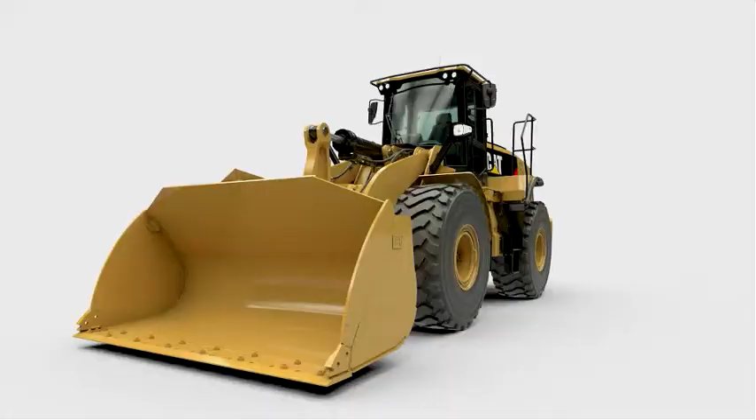So Danny, can you tell me a little bit more about the new CAT equipment? Yeah, Edgar, of course. Now, Caterpillar made the biggest changes several years ago. The majority of the iron in this machine is the same as the previous model. That's great news for us. With so much proven technology, you're looking at some of the most reliable products ever introduced by Caterpillar.

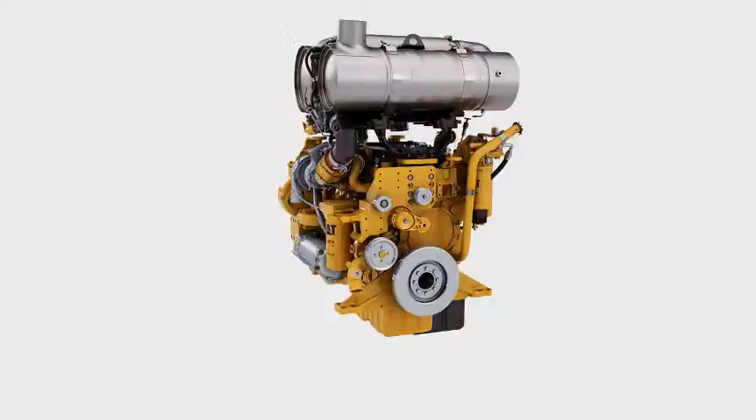You mentioned that the engines in the 175 to 750 horsepower range really hadn't changed that much. That's right, that's right. They were retuned to reduce particulate matter. That means the changes to the after-treatment packages are focused on NOx reduction. Let's follow the flow of the exhaust as it leaves the engine.

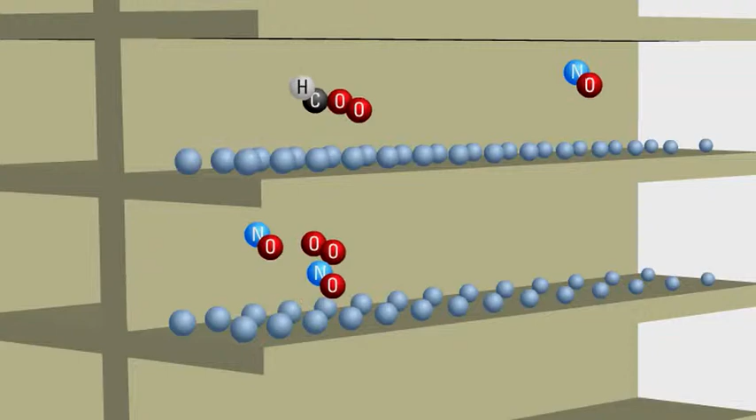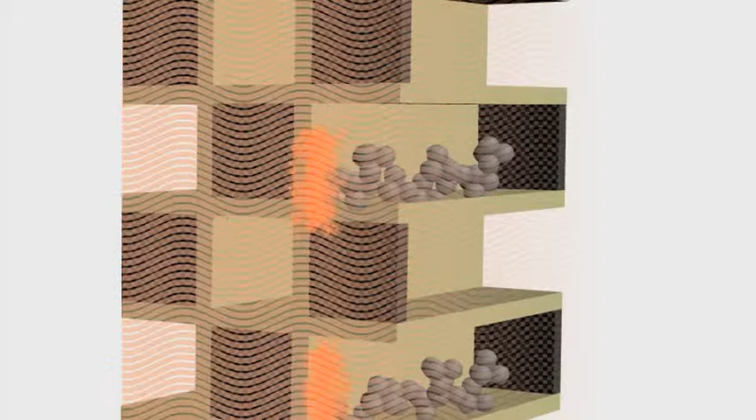First, some of the emissions are oxidized by the diesel oxidation catalyst. The diesel particulate filter traps whatever particulates do enter the exhaust stream. And if soot builds up, the active CAT regeneration system activates and removes it. This regeneration is automatic, so the operator really isn't involved and the work cycle is uninterrupted. Sounds like the Tier 4 interim solution.

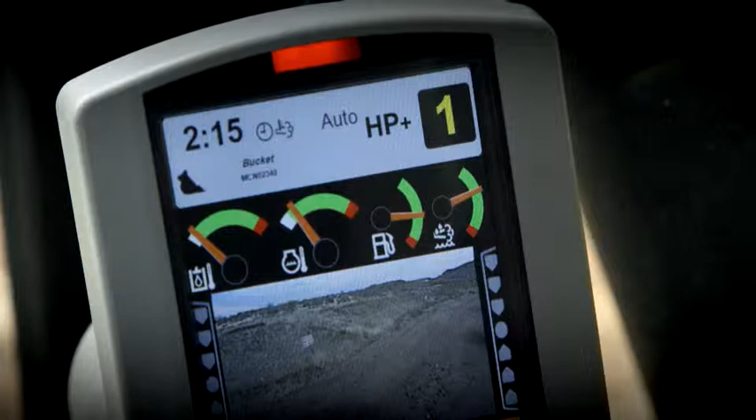It does, yes, but remember, in Tier 4 final, the engine reduces the amount of particulate matter that reaches the after-treatment system. Really what that means is regeneration doesn't happen as often. You may notice the regeneration system runs at startup, not to remove soot, but to warm up the new selective catalytic reduction system. So this is where the diesel exhaust fluid comes in. Yeah, that's right.

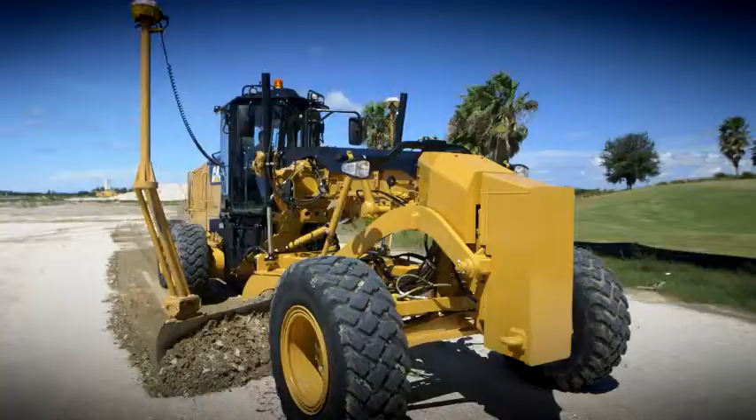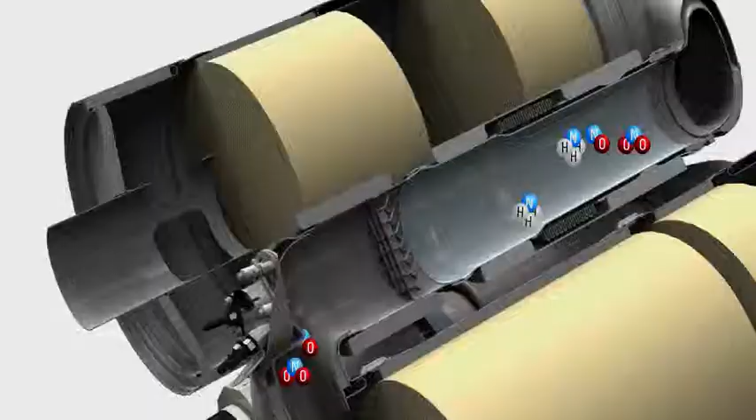The diesel exhaust fluid, or DEF for short, is a combination of water and urea. And it's used on all equipment with engines between 175 and 750 horsepower. Engines outside this power range may use a different technology. DEF is injected into the exhaust stream.

The water evaporates and the urea turns into ammonia. The ammonia mixes with the NOx and enters the selective catalytic reduction system. The catalyst in the system causes a chemical reaction which converts NOx emissions into two products: nitrogen and water vapor. So there's some new technology to keep track of.

Yes, it is. But here's the good news, Edgar. Caterpillar made it simple. About all you have to do really to maintain the engine and the after-treatment system is to fill the DEF tank every time you fuel up. It's just that simple.

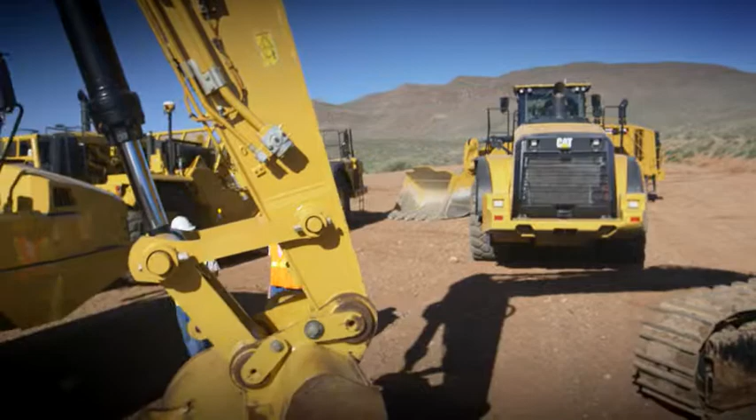Hey, look, do you have any more questions about the diesel exhaust fluid? Yeah, so you said that I should add DEF whenever I fuel up? Yes, that's the best way to go. Your engine needs two things to run: of course, diesel fuel and DEF. So if you fill up the DEF tank every time you fuel up, you'll always be ready to go, buddy.

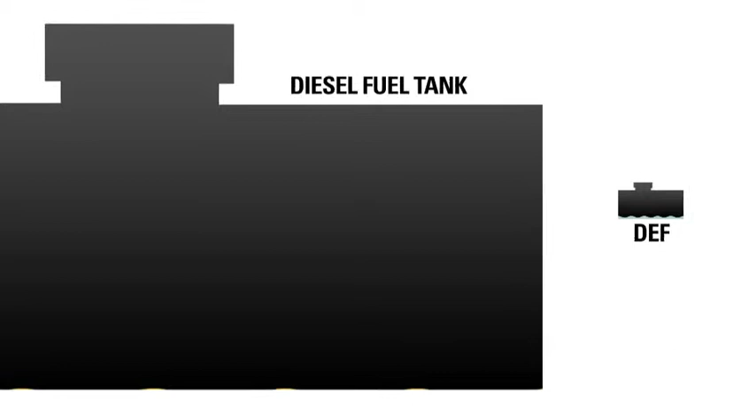You see, the fuel tank and the DEF tank are size proportionate. That means that if you start with full tanks, you'll empty them both at about the same rate. What if I run out of DEF? Well, it shouldn't be a surprise because there are level gauges in the cab. But if you run out of diesel exhaust fluid, your engine will lose power and then idle or shut down.

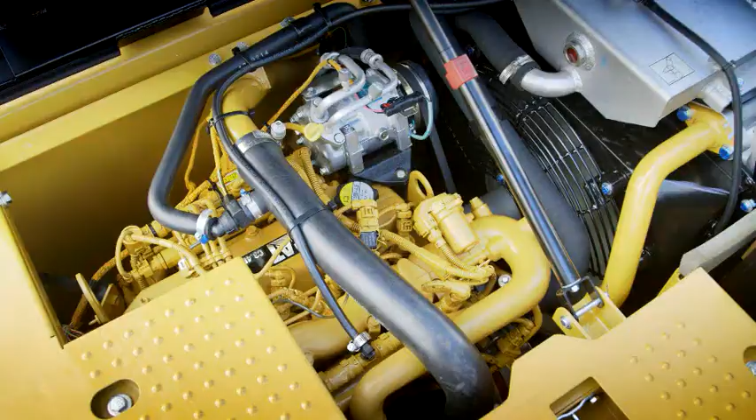Think about it this way. If you run out of fuel, your engine shuts off. If you run out of diesel exhaust fluid, same thing, your engine shuts off. What else do I need to know about DEF? Well, I'll tell you three things. First, DEF can freeze in cold temperatures.

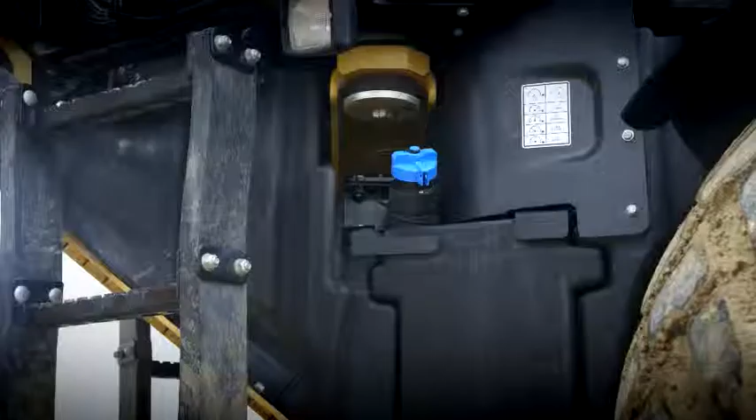So when you shut off the machine, DEF is emptied out of the lines so that they don't freeze between shifts. Now, in cold weather, the DEF in the tank will freeze, but there's a heater in the tank, so at startup, the DEF is thawed automatically. The machine takes care of that.

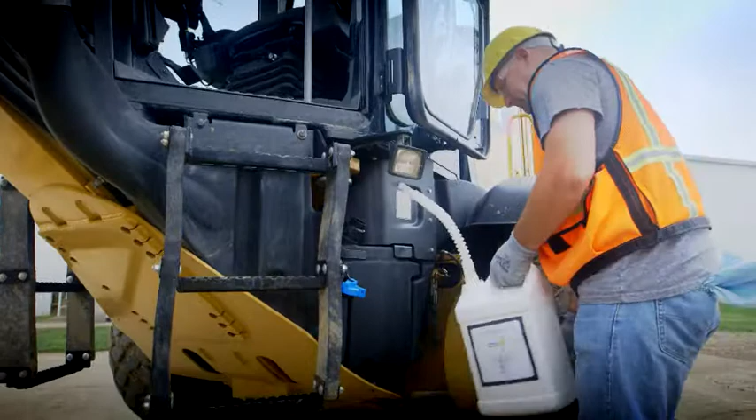Second, it's very important to use the right kind of DEF. The CAT equipment is designed for commercial grade DEF that meets ISO 22241-1, and you can get it at fuel and oil retailers anywhere.

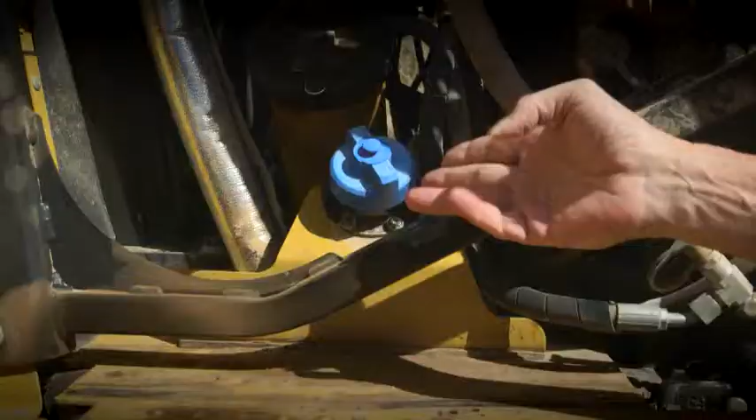Third, and this is going to sound like common sense, Edgar, but you want to pay attention to contamination control. I'm pretty sure I know what you're talking about, but walk me through it. Sure. Start by cleaning the DEF tank filler cap and the area around it. Now you're ready to open the cap and add DEF. You want DEF as clean as the day it was sold, Edgar.

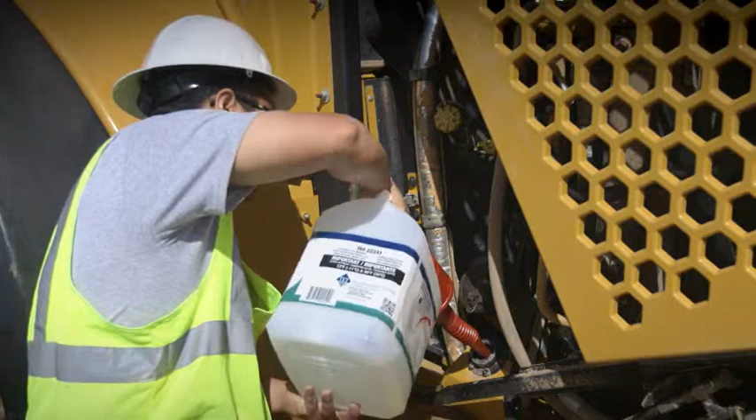You don't want to fill up the tank using any kind of dirty container. And that includes the funnel that you use. It's just as important. Use a clean one. Also, be careful filling the tank. You don't want to overfill it. DEF is corrosive to some metals, and you'd hate to mess up that nice paint job there. Finally, you want to clean up any DEF spills immediately.

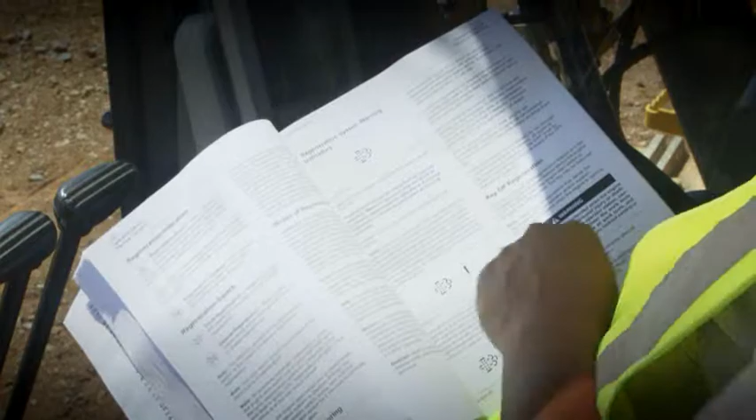Sounds pretty simple. Well, it's just like hydraulic fluid or diesel fuel. Keep it clean and you keep it running. Also, if you need a reminder, your machine's operation and maintenance manual has plenty of information on DEF, including the contamination control and the proper storage.

Hey, Danny. Yeah. Did you say the engine might keep running even after I turn it off with the key? Yes, sir. It's one of the changes that Caterpillar made to support the after-treatment system. It won't happen very often, but if it does, it's completely normal. When you turn the key to off with Tier 4 final equipment, the engine may continue to run for a time in order to cool down the exhaust system.

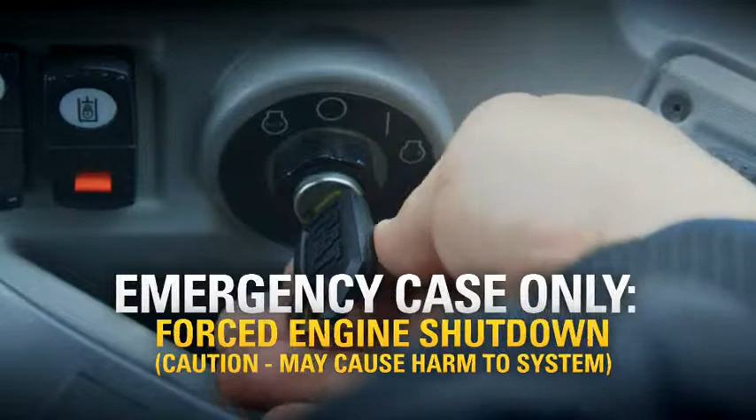If you have an emergency that requires an immediate shutdown, turn the key all the way to the left, but make sure it's an emergency. Forcing an engine shutdown may damage the after-treatment system. Okay, anything more I need to know about the shutdown process? Yes, there's been a change in the battery disconnect procedure.

The reason is, now in cold weather, diesel exhaust fluid can freeze. So you need the battery to operate the pump that moves the DEF out of the lines and back into the DEF tank. Pay attention to this light. It is the wait to disconnect lamp. Do not turn the battery disconnect switch to the off position until this lamp goes out. If you disconnect the battery while the wait to disconnect lamp is still on, you may damage the after-treatment system.

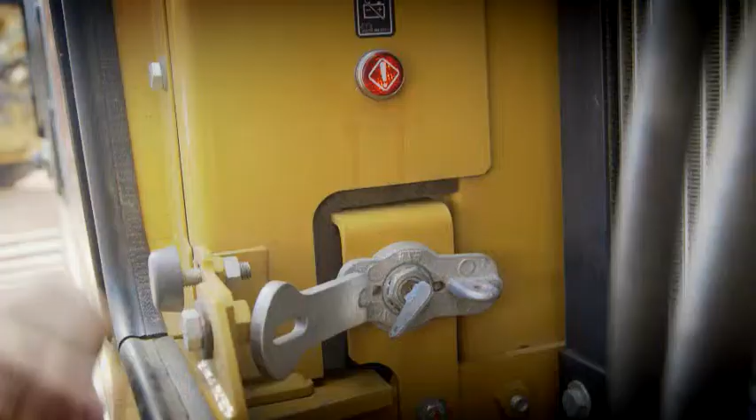Okay, so turn the key off and let the engine run. Right. And do not disconnect the battery until the wait to disconnect light goes off. I believe you got it. Any questions? Nope, I think I'm good. Good.

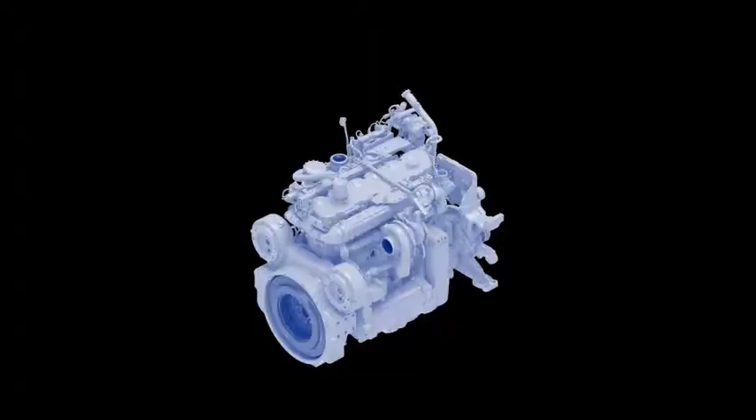Well, thanks for taking the time to talk to me, Danny. Yeah. So tell me, what do I need to know about Tier 4 final regulations? Well, Edgar, nobody, of course, likes to talk about regulations, but I'll sum it up this way. Tier 4 interim rules focused on cutting particulate matter emissions. Tier 4 final reduces the amount of NOx allowed. The good news is that there isn't really a lot to learn to use the equipment. Caterpillar has made it as easy as possible to operate.

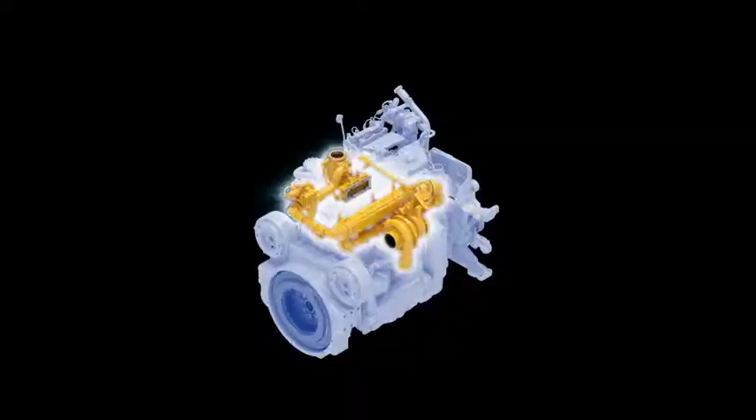So what's changed? Well, let's start by talking about what hasn't changed. For instance, the majority of the iron is unchanged from Tier 4 interim. Tier 4 engines and after-treatment packages quickly became the most reliable generation of machines ever introduced by Caterpillar, proven in thousands of machines over millions of operating hours.

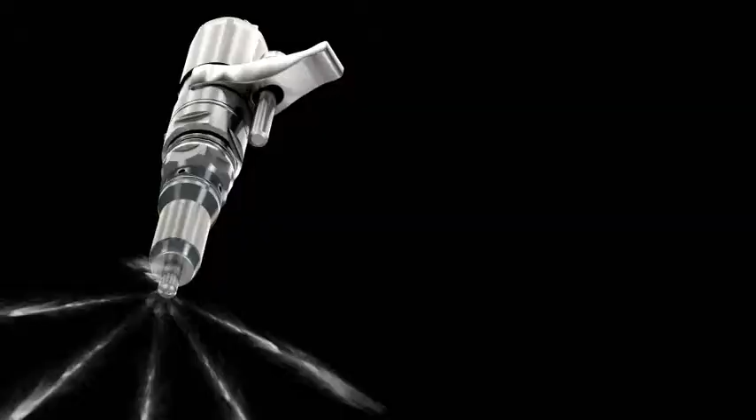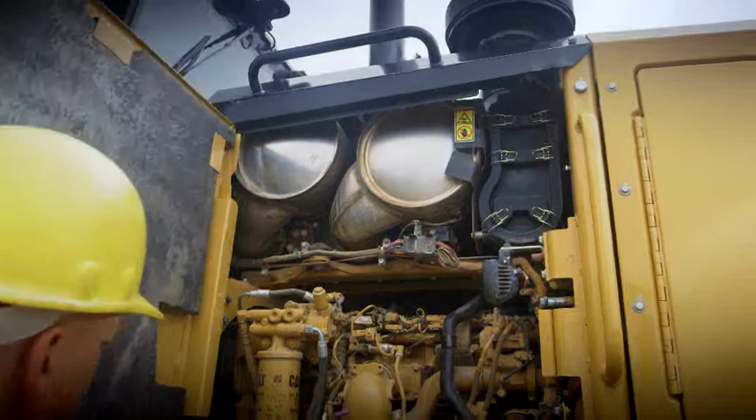Now, that means that these new machines are based on the same proven building block technologies: fuel delivery, electronics, air management, and combustion design, all optimized to work together. The new engine and after-treatment packages even fit into the same space. About the only change to the outside of most Caterpillar machines is the blue filler cap for the diesel exhaust fluid, which is used to reduce NOx emissions.

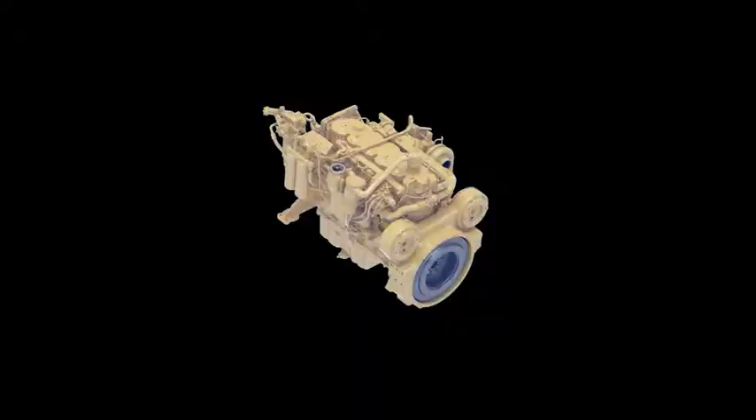So diesel exhaust fluid is new? Yep. Diesel exhaust fluid and the selective catalytic reduction system have both been added to all equipment with engines between 175 and 750 horsepower. And just those two things made it possible to cut NOx emissions. Tier 4 final engines are tuned to produce low levels of particulate matter, and the after-treatment system is focused on NOx reduction. But emissions are just one part of the story.

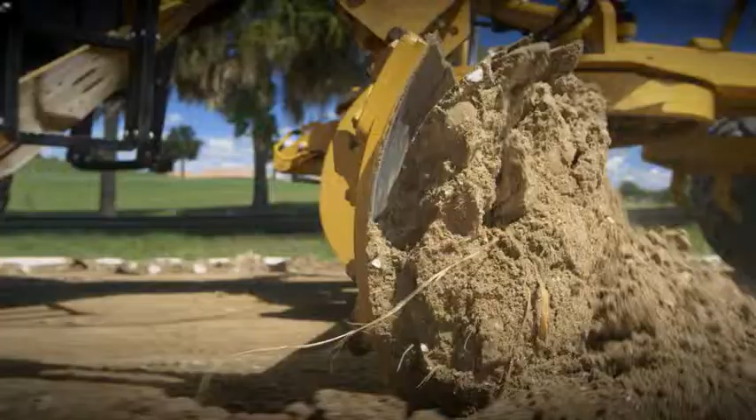The newest CAT equipment delivers the performance we need more efficiently than ever, which means we get the job done right and control our owning and operating cost. The benefits go straight to the bottom line.

Yeah, Edgar, I tell you, I really do like this new CAT equipment. I mean, I know they were designed to meet the requirements for the new T4 final, but they still have the power and the reliability that you depend on when you think Caterpillar. And they're more efficient, too. More efficient? Yeah, that's right.

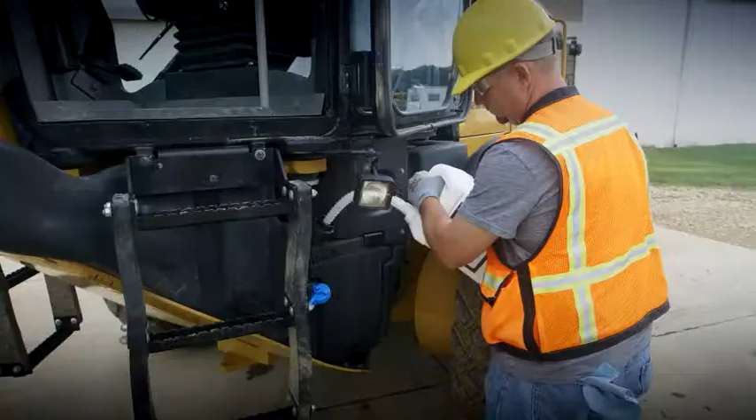We may not speak of it in terms like we used to, but, well, let's take fluid efficiency, for example. Don't you mean fuel efficiency? Not anymore. Fluid efficiency accounts for both fuel and diesel exhaust fluid. You can't forget the DEF. Now, new CAT machines do use less fuel than the previous models, and that's great, especially in countries with high fuel costs. But you still have to add in DEF to account for your total fluid costs.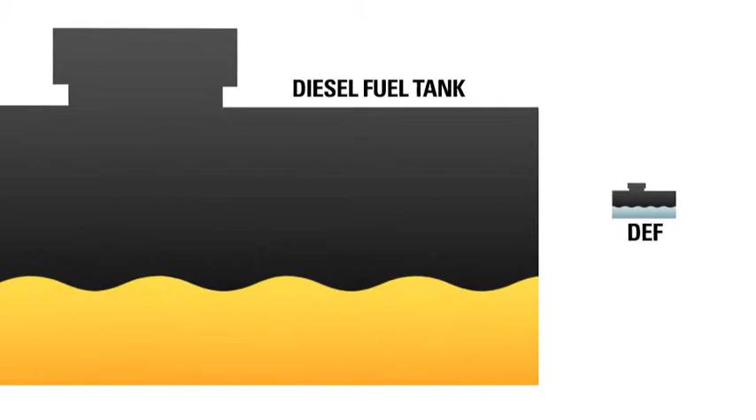Now, here's the really good news. Take a Tier 4 interim machine with a full tank of diesel. Now, compare it to a new machine with a full tank of diesel and a full tank of DEF. On average, the new CAT machine will use up to 5% less fluid to do the same work as earlier machines. 5% less? Yep, and up to 8% less diesel fuel. Oh, you're going to love running these machines, buddy, I can tell.

Man, I love that new cab smell. Yeah, I do too, Edgar.

Now, I noticed some new lamps here. What do I need to know about them? Well, you're looking at the lamps that have to do with the after-treatment system, and of course you recognize the regeneration lamp there, having run a Tier 4 interim machine before. Yes, there's regeneration in process, regeneration needed, and regeneration disabled. Exactly, and then of course there's the DEF gauge, fuel gauge there, so pretty proud of you there, Edgar. You're doing good, son. You learned more than you thought you did, didn't you?

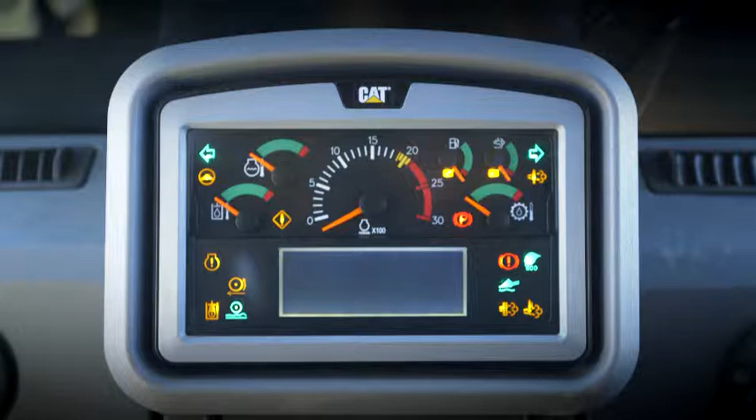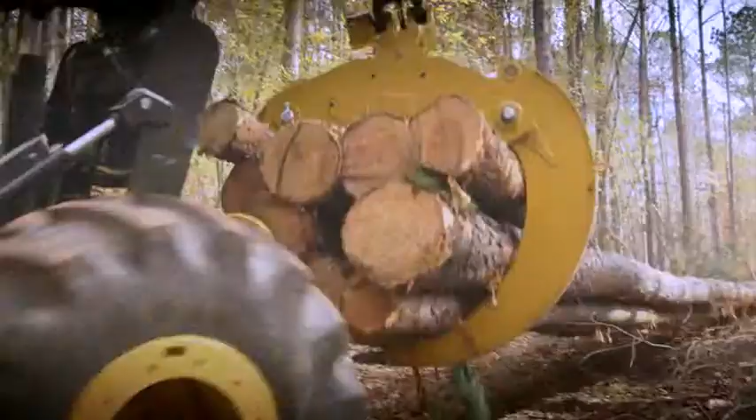These other lamps will illuminate if there's any emission systems fault or engine or after-treatment fault, or if the DEF tank gets low on diesel exhaust fluid. The good news is you probably won't have to worry about these lamps, especially if your machine is set to regenerate automatically and you fill the DEF or diesel exhaust fluid tank at the same time that you fuel up. That is good news. It is.

I can't emphasize how important it is to know your lamps, Edgar. It really is important. I would highly recommend learning this card right here. It's got all the details for you.

Danny, can we go back and talk about regeneration for a bit? I know how it worked for Tier 4 interim. What's different with Tier 4 final equipment? Well, you remember when we were talking about the regeneration with those Tier 4 interim machines? I know that probably seems like forever and a day ago. It sure does. Well, regeneration works to control soot the same way in Tier 4 final engines. The difference is the system doesn't have to work nearly as hard because the engine has been tuned to reduce particulate matter before it ever gets to the after-treatment system.

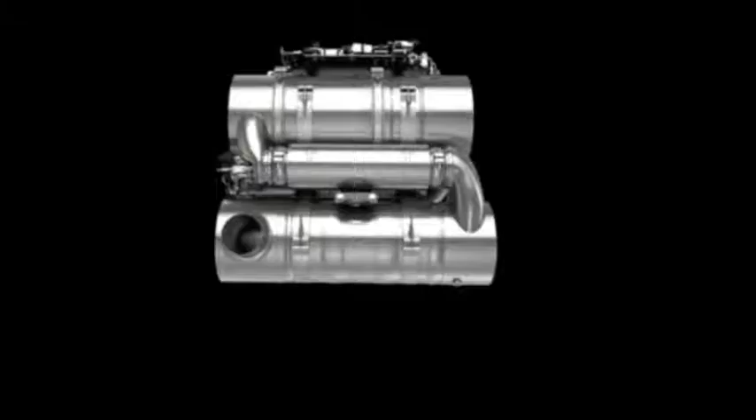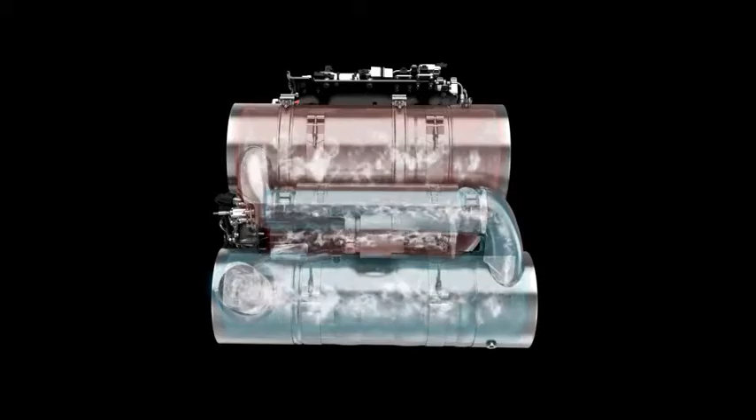Okay. Here's the difference in Tier 4 final machines. The regeneration system is used to warm up the after-treatment package. So you may notice regeneration beginning right after you start the machine. It's also used to maintain the system and to clean up any urea deposits. It's running not to remove soot, but to warm up the new selective catalytic reduction system. Same technology, but a little brand new use for it. I'd say that's pretty smart, wouldn't you? What else can I help clarify for you?